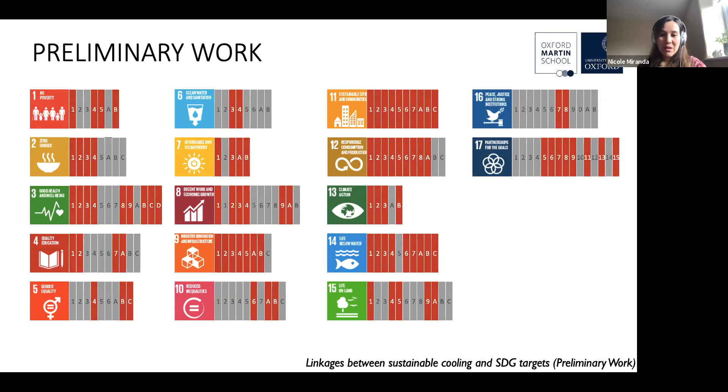And in red, you can see what we thought. So I'm saying this, it comes from us. It's not published and it's not obviously a systematic review yet. But as you can see from this initial assessment, we did identify that there were links everywhere. So then we thought, okay, there is potential here. Let's go and see what the evidence is saying. And so then we went into the literature with a systematic review.

We chose common words for cooling, such as the ones in this block. And we did 17 searches, one for each Sustainable Development Goal. Okay, so just as an example here, you can see the words that we used for Sustainable Development Goal 7, which is access to clean and affordable energy, which I think is of interest to this public. We did this search on Web of Science because it has more than 12,000 journals in different disciplines. And it was a topic search.

So that means that all these words in the 17 searches were looked at in the titles, the abstracts, and the keywords. And from this, we found about 5 million papers that would cover all the SDGs. And from the 5 million papers, 0.43% of the articles also covered cooling. So only 0.43% would be a subgroup of the SDG papers that covered cooling.

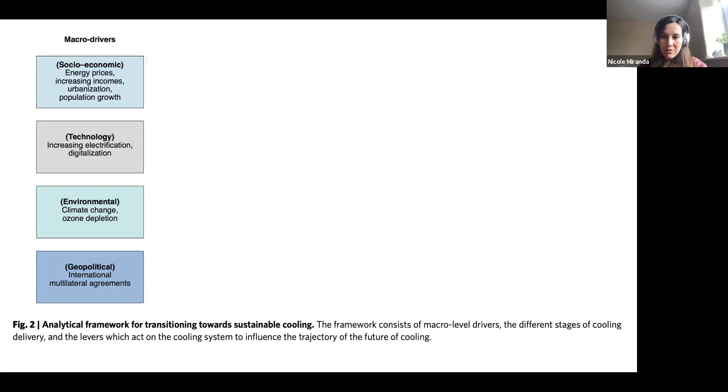Environmental is, I consider, the most clear macro driver, because as climate change progresses, so will temperatures. Temperatures will increase, and that will result in more cooling demand. And then geopolitical drivers, those are the most macro governance drivers. And of course, they look at how countries and private sectors develop cooling, not only the technology side, but also policy.

So having these macro drivers, we then said, let's define the cooling system. And initially we look at stages of cooling. This resembles a life cycle, as you can see, but I'll run you through how we've defined it specifically for cooling. So resources, we consider extraction of materials. Production and assemblage is combining those materials for a passive or active cooling technology. This includes up to deployment of the technology.

Cooling activities is the most multifaceted one, because it includes purchasing, operating, and maintaining the technology, but that's where lots of the end user, the people interaction, comes into place too. And then end of life, just like a life cycle, would be removal, decommissioning, and it can include recycling, upcycling. So it could link back into the resource side. So I'll give you an example of an active system and a passive system now that run through these stages of cooling before continuing with the framework presentation.

For an active cooling system, this is a district cooling system. So you have centralized active technology such as chillers or absorption cooling or air conditioners, and they provide district cooling to different households here. Resources would be anything you need to produce those chillers, those pipes, so plastic, and then also a resource would be the fluid that you're going to circulate through those pipes.

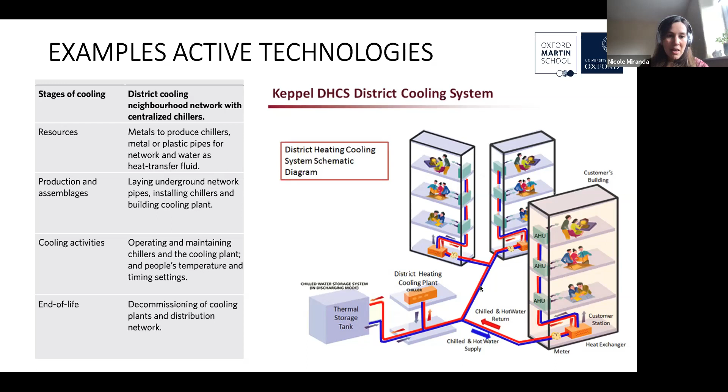So an example of a passive technology, this is a completely different side, would be the use of plants. And for plants, you need to orient them in the right place, because that will optimize for shade. So resources are very different here. You can see seeds, cuttings, soils, nutrients, and water. Production and assemblage is what I was saying, putting them in the right location.

And then the cooling activities, maintenance for this is so different than for a sturdy technology, right? It's pruning or watering. And end of life, of course, is taking this out when it's necessary and perhaps giving it a sustainable end, such as sending it as biomass for heating. So those are just two very, very different examples of active and passive technology.

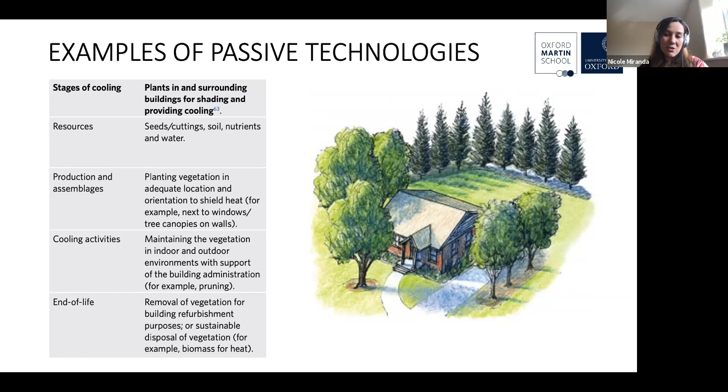And going back to our framework now, after we identified these stages of cooling, we said, okay, what can change these? What are the levers that we have to make changes and interventions in these stages? And we identified five. So social interactions includes everything to do with behaviors that can shape the technology adoption. For example, there might be very pro-environmental choices made, or there could be a status thing.

And as a background, this person and this community gave status to having an air conditioner. So it's a behavior that unfortunately gets the adoption of this kind of technology, because we then figured out it was a secondhand air conditioner. So it doesn't have the best efficiency, and it probably was sold on a black market. So there's lots of negative connotations around adopting it, but for the end user, it gives them the status. So it's a behavioral example.

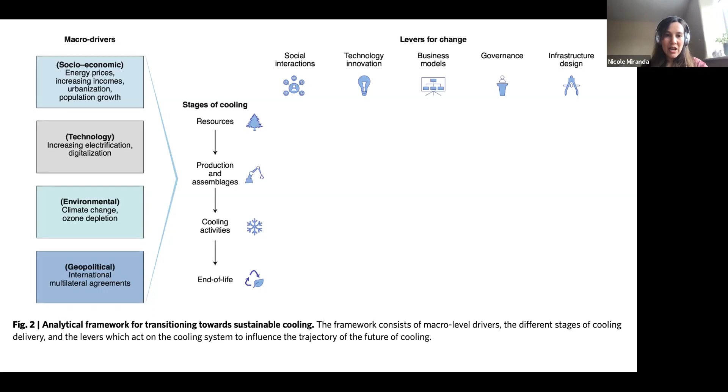And when we cross over all these levers of change with the stages of cooling, we find 20 intervention points. So these are the intervention points we've identified. And in the next part of the presentation, I will give you examples of interventions that we are looking at that we consider could support cooling to transition to a more sustainable future.

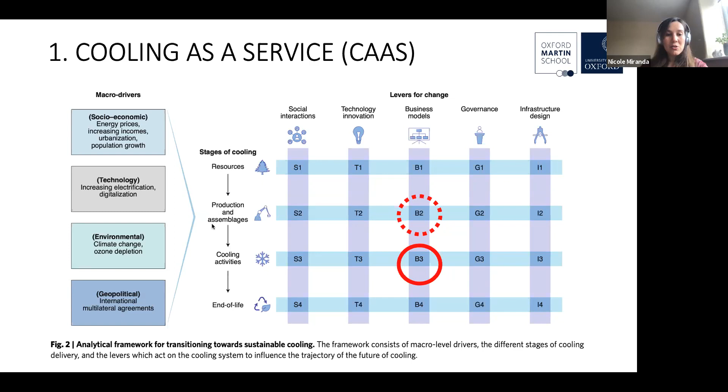So the first intervention point is cooling as a service. So this is a business model, and that's why it is in this column. And it's mainly based on cooling activities, but it also may affect production and assemblage. And let me go a little bit deeper on that. So the value proposition of this business model is to make sustainable and more environmentally friendly cooling broadly available.

The basic principle is that a company retains the ownership of the assets. So for example, on top of a building, on a roof, there you can see the air conditioners, and one company would be owning this. And the end user then only pays as if it was pay as you go for the cooling provision. This has environmentally positive things because it is in the company's interest to have more efficient technology and maintain it properly so that the life cycle of that technology can be extended and it can perform well.

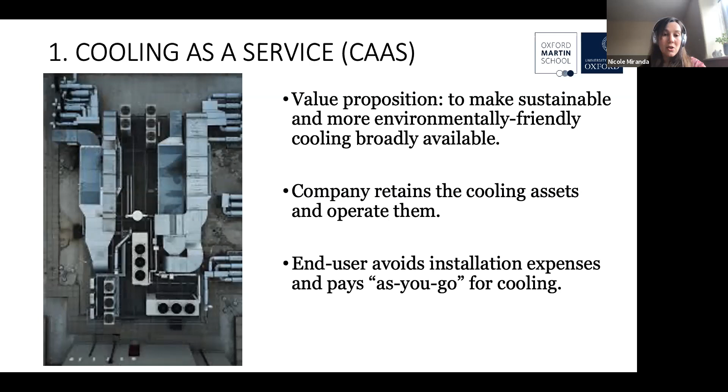At the same time, the end user, because they are paying for the operation, or pay-as-you-go, as I've said, they don't have to pay for capital expenditures for the installation. So that's quite a positive thing. And this business model has study cases all around the world already. It's really picking up, and we haven't seen alternatives to it. We're looking into it, but for now, it is offering a really good value proposition.

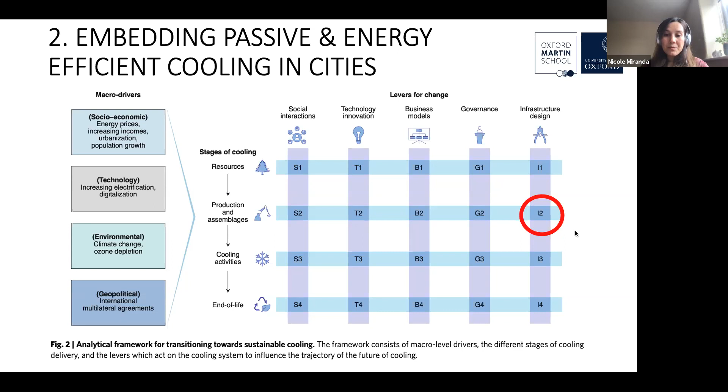The second intervention point that we're looking into is embedding passive and energy efficiency cooling in cities. Cities is where cooling demand will surge because there's a higher population there. We also get the heat island effects there. So it's important to start planning from now on, because passive cooling has a very long lifespan. It could be really embedded into buildings.

So for example, shading and vegetation around, or glazing of windows there, and ventilation systems, natural ventilation systems, all things that need to be started from the design of buildings. And on that front, they may last longer than the active systems, because active systems have moving parts, so electromechanical components, and so they are more prone to fail because they have those parts.

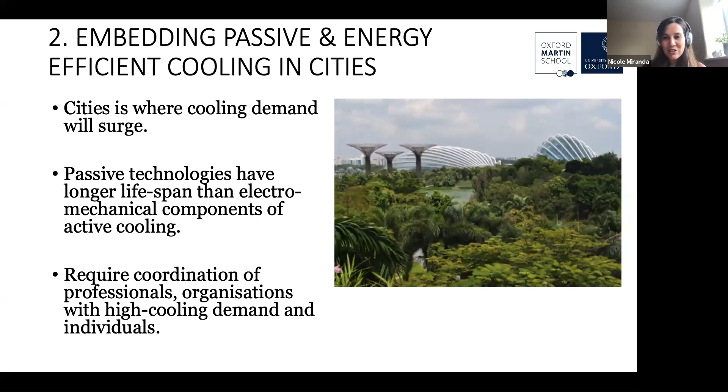Another intervention point that we've identified is the global phase down of F gases. And we put this in the governance column because of the Kigali Amendment to the Montreal Protocol. So that has set targets. And just to give you some scary statistics, there are predictions that if we don't phase refrigerants out by 2050, 20% of greenhouse gas emissions might be due to these HFCs and CFCs.

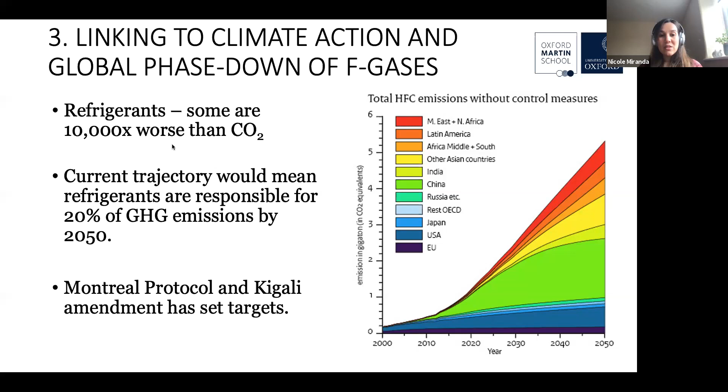So the US and Japan both have 90% of their households with air conditioners. However, the consumption of energy for cooling in the US is 6 times more per capita compared to Europe, 20 times more compared to India. And these figures are not repeated in Japan. In Japan, air conditioner use is the last resort. First, they prefer ventilation, opening the windows.

There have even been movements around changing outfits for work. So people don't have to wear their full suits for work, and they can wear a badge that says I'm pro sustainable cooling. So you can see the difference in lifestyles, and that's something that we really need to understand to harvest the good things around cooling, the socioeconomic and psychological factors.

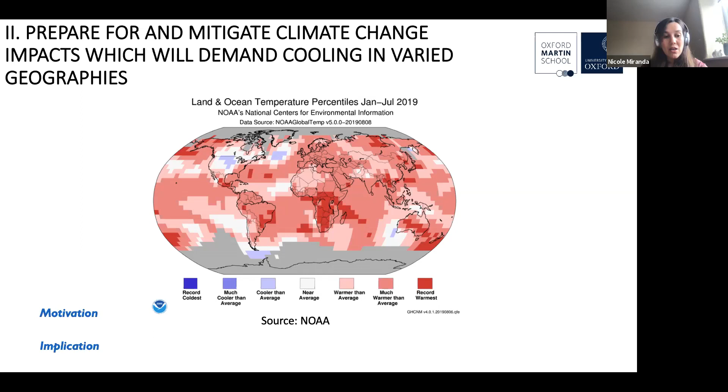The second is that we do need to be more aware of the demand for cooling in different geographies. It's not going to only affect the tropics. It is coming more and more to countries that are traditionally unprepared for heat waves, like the UK, where the infrastructure and people are more prepared for cold than for heat.

Finally, we need to think in long-term solutions. First, before going and buying an air conditioner off the shelf, we need to think of passive cooling systems. There's going to be a point where passive might not achieve thermal comfort because temperatures are going to be too high, but we need to think of how to mitigate the use of active cooling. So those are the 3.

Oh, thanks, Nicole. That's been super interesting. I really like this last point where you had this sort of feedback loop of cooling makes the planet warmer over a super long time scale.